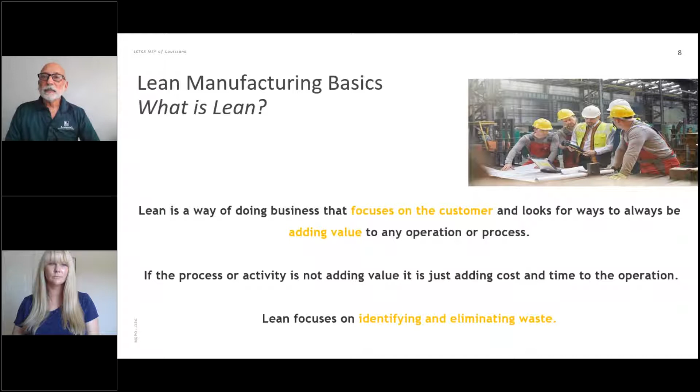The development of lean concepts and tools enables any company or organization to adopt and implement lean throughout their operation. So while the MEP of Louisiana focuses on manufacturing companies, I want you to understand that lean can be implemented in any type of company. In service industries, we've also done it in the medical industry. You can do it, of course, in manufacturing, where we're focusing today, and lots of other places. So lean works everywhere. Once again, it focuses on identifying and eliminating waste and making us more productive.

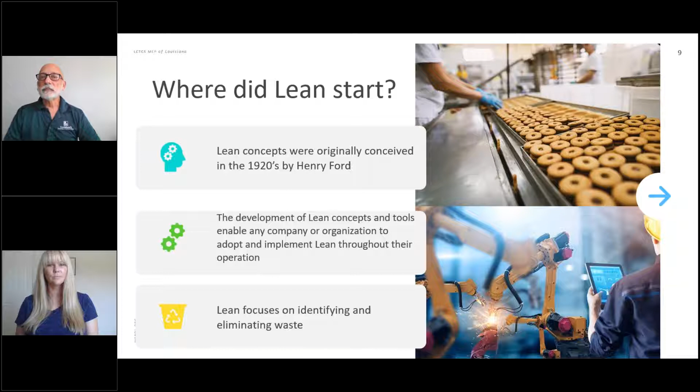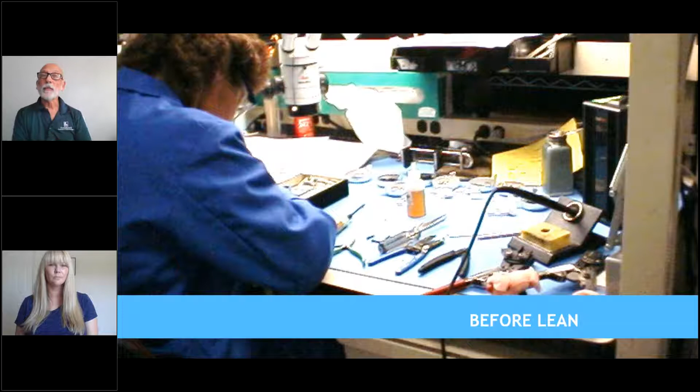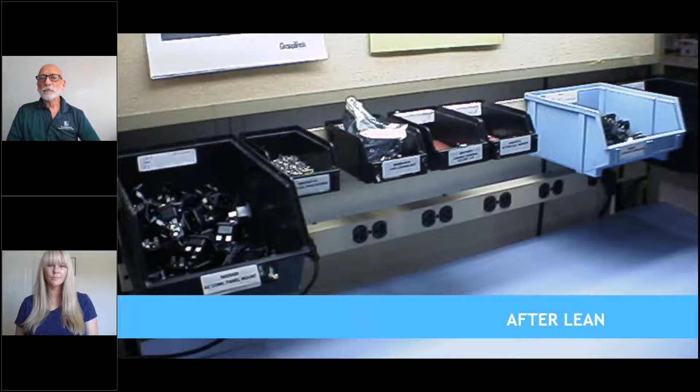Let's look at the next picture as to after lean, what we got. After lean, you can see that all the components used for that job are labeled clearly. They're raised up so that the work surface is clean and neat. On the wall in the background, you can see there are work instructions there to explain the processes for that operation. So lean has always been valuable and important, but in today's climate, it's even more critical that we do this as much as we can so that other people can slip in for us and help out if we need.

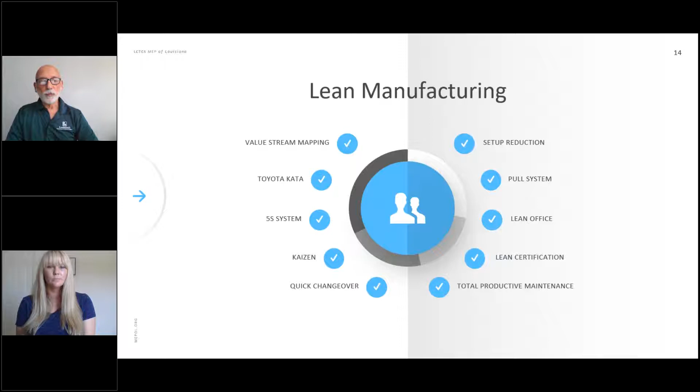And then total productive maintenance is where you're looking at not running equipment to failure, but having a plan in place where you check and work on equipment on a scheduled basis so that you extend the life of your equipment and have less downtime. That's what we're looking for. All right, let's go to the next slide.

All right, so let's look at some examples of the 8 wastes of lean. Typically when we're looking at the time we spend on value-added work, 95% of the time we spend from when we get a phone call for an order to when we get paid for that product or service is non-value added, meaning those are tasks we do that don't necessarily improve or change the product we're making. There are all these other things we have to do.

So let's look at some of those wastes: defects, rework, overproduction, and work in process.

One of the things we do in lean is look at balancing workflow. Right now, especially while employers are very challenged with bringing people onto the workforce and having enough people to do the job, we find sometimes you might go to one station and somebody's really got a pile of work ahead of them, struggling to get their work out that day, and the next person doesn't have much to do. So we look at how we can balance that work throughout the plant, and how can we work better with the resources we have, and not just cause other people up the line to be waiting.

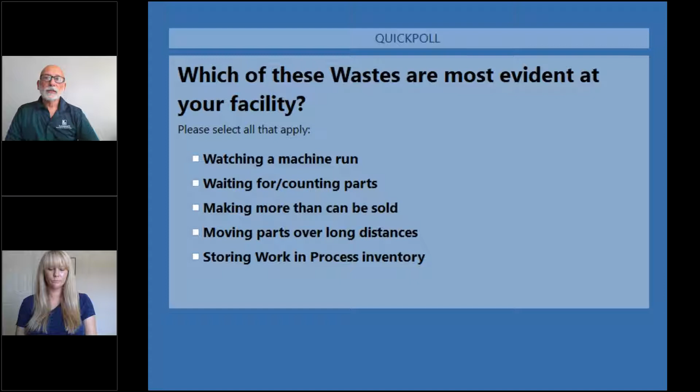All right, so let's look at which ones are the top hitters for us. So watching machine run, right? Sometimes when you just walk through the plant, you might see somebody idle and they're just watching. So either they're very good at what they do and they've automated some of their processes, or there may be a little bit of waste there. They might be just waiting on things, waiting for counting parts. This is obviously one of the top ones that we have in the survey. Things that we can do to eliminate having to do those things manually - either having containers that can fit a certain amount, or ways to count those things a little bit easier, having ways to label those things - it helps eliminate some of that waste.

Making more than can be sold - we may all be a little bit guilty of that. Sometimes we want to keep employees busy, but when you do that, you're tying up raw materials, and you're also putting wear and tear on your equipment and machinery. So we want to keep that in mind. That's definitely a good waste to keep an eye on.

Moving parts over long distances, another high hitter for us. When we come into a company and we work with them about making things more efficient, that's one of the first things that we do in interviewing employees - like, where are you going to get the things that you need, and how can we change that a little bit to make it easier for you so that you can have more productivity?

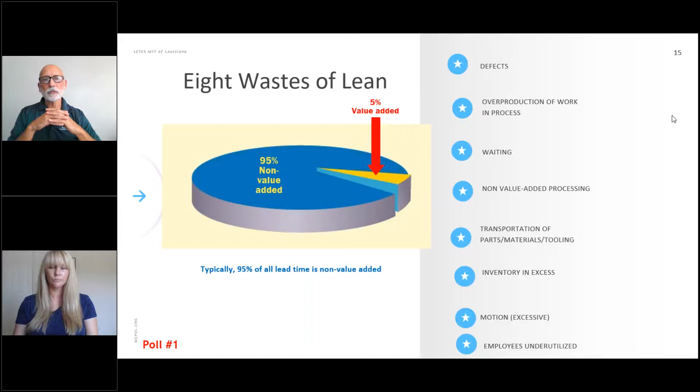All right, thanks so much. That was certainly some good answers for us. All right, next slide.

Why would we want to focus on those 8 wastes? Because the 8 wastes are just symptoms of a more systemic problem. Recognizing waste leads to identifying the root cause. Another thing we train folks for at our plants is root cause analysis, a great tool, looking at the 5 whys and the why tree.

Getting down to the root cause of why something keeps happening, or why we keep having defects, is very valuable. Underlying any waste is a systemic flaw involving people, materials, machines, and or information. Maybe we're working from the wrong instructions, or not the latest revision. It's human nature to point fingers and blame people, but with lean we try to pull back from that and say, hey, we all have potential. Let's look at where things broke down. It's not just a people issue. Maybe they're not working with the best equipment, or something needs to be repaired on their machine so they don't have defects on the final part. We try to look at all those things and get to the root cause so we can make improvements that are sustainable.

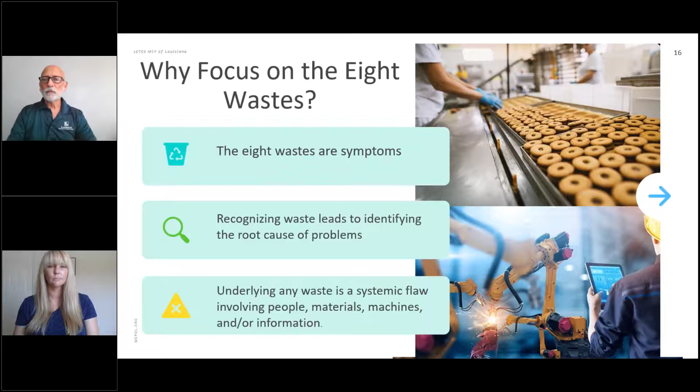The next thing we want to talk about is examples of those wastes. Watching a machine run speaks to underutilized people. We all may think we don't want to be challenged in our jobs, or we'd rather not be so stressed out, but it's human nature to want to be fulfilled when you leave at the end of the day, knowing I made a difference in the company, I made some parts, I got things accomplished. You don't want to watch the clock all day long.

Waiting for parts is waiting waste. As a few of you mentioned in the poll, counting parts, making more than can be sold, moving things -- these are all key things we want to identify. Typically when we come in and work with a business, we do a basic lean assessment to see where the greatest opportunities are for improvement, then identify those areas and start working on the low-hanging fruit, where you can have the most impact, and it becomes a program of attraction.

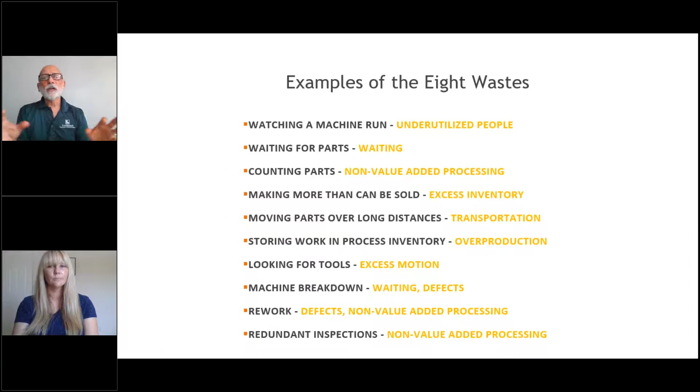We worked with several companies where we couldn't get a volunteer to let us go in and actually evaluate their work area. Nobody wanted to let us know that their baby was ugly. But once we finally got a few reluctant volunteers and started to improve their work areas, we had people coming up saying, hey, can I go next? When is it going to be my turn? When are you guys coming over to my area to make it better? So it becomes a program of attraction where we really want to make things better for employees, so they're not in a stressful work environment. It's a really good benefit.

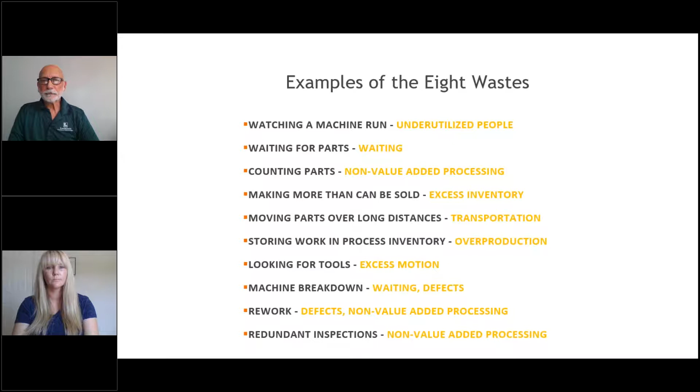Standards are more than documents. In doing lean and implementing lean in the facility, there are several key things, and what we call SOPs, or standard operating procedures, really help make a job much more efficient. If you have employees who are sometimes removed from the work because they have to be quarantined, or they're taking vacation, or they call in sick, someone else has to come in and sit in their place. These things help the whole company stay on their production schedules and be efficient, without more defects and waste.

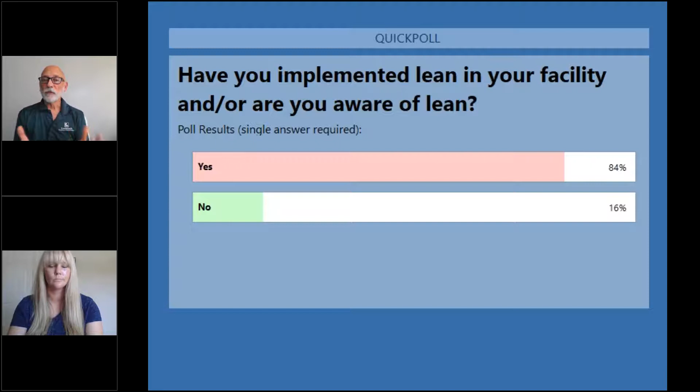So make sure if you're going to have an effort, or you might have what we call a Kaizen event where you're focusing on an area to improve, make sure you're including the people that work in the area so that they have some input and feel valued. You're going to have a much better chance of sustaining those results. Okay, let's go to the next slide.

All right, so another tool we are introducing is called Toyota Kata. We have a little bit of detail on the right. So what this is, is sort of new habits—developing new habits, allowing people to think differently about problems and goals.

Remember a few minutes ago I mentioned we want to get away from finger pointing and saying, oh, it was just that person, boy if you just get rid of that person we wouldn't have any problems. We want to think differently, we want to think as a team. It's an opportunity to work together and use critical thinking skills. We want to use scientific thinking to help make teams and organizations more effective and successful.

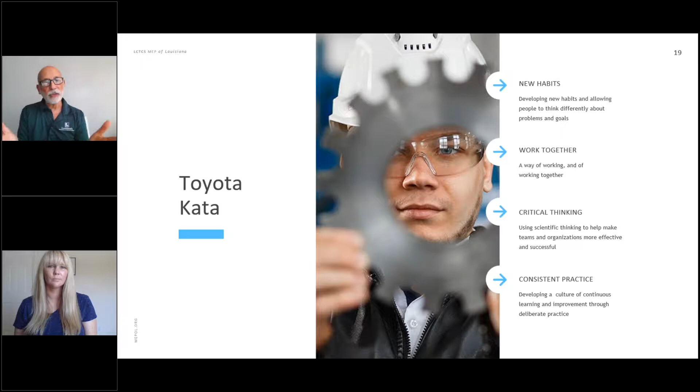So when we try to tackle a challenge or a problem we're having in the organization as a team, we have more input. Sometimes it's good to invite somebody outside of where the issue is happening, so we have outside eyes looking at it from a different perspective. We teach these things to help people develop a culture of continuous learning and improvement through deliberate practice. It takes some time—it's a culture changing thing, but it's also very beneficial and good to sustain.

All right, next. Now we have another polling question after this slide. So we're going to talk a little bit about business continuity plans. Business continuity is planning and preparation of a company to make sure it overcomes serious incidents and/or disasters and resumes its normal operations within a reasonably short period of time. As you all know, or are too painfully aware, we've had 2 hurricanes this past year.

We're in the middle of hurricane season again right now. We had an ice storm that was quite unexpected, and I was lucky enough to have one of my children getting married that week—it was quite an interesting week. And we have to have backup plans for these things, right?

So we're looking at this: what are the components of this in a nutshell? It's a risk assessment, identifying the impacts to the business. It's site and location specific, because even though we have a company with multiple locations, we're not all affected the same way or impacted the same way from a hurricane or a storm or other things like that, right?

It's going to cover all aspects key to continuing to be in business, identifying whether or not we have backup plans, training and drills. This is a critical piece of this. So, let's practice—what do we do? Let's have a mock-up of an event happening, and see if we have any gaps in that, or if it falls through, or we actually execute it well.

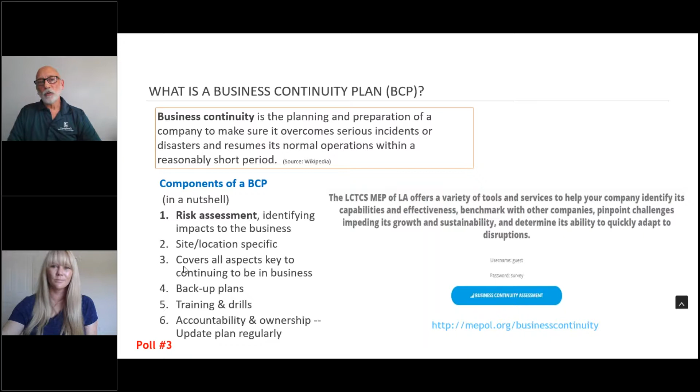All right, let's get on to the next slide. Tell a little bit more about it.

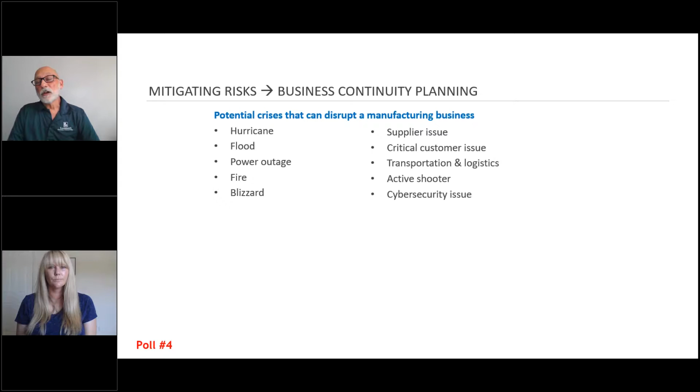We want to talk about mitigating risk. What type of risk? Potential crises that can disrupt the manufacturing business, or any business actually: hurricanes, floods, unexpected power outages, fire, blizzards. I wouldn't say blizzards necessarily down here, but we definitely did experience an ice storm that crippled lots of businesses here this past February. You wouldn't guess it from the temperatures the last few weeks, but yeah, we did suffer that. Supplier issues — while you may be in an area of the state that doesn't often have to deal with any of these things, or you really have your business set up well, you may be impacted by whether your supplier can get to you or not. Having some backup plans are critical.

Another service that the LCTCS MEP Louisiana offers is scouting for suppliers throughout the United States. A key benefit of the MEP, and the fact that it's here in Louisiana, is that we're connected to all of the MEPs throughout the United States. We have a portal where, if we have a request from a client looking for a supplier — maybe one of these things happened to them — we can send out a request and look for help to do a scouting project to find a backup supplier, or to get another key supplier so that you're not so dependent on just one, okay?

Critical customer issues, transportation logistics — when roads are frozen or there's flooding and different things — are issues you want to make sure you can mitigate. Active shooter, a fairly recent phenomenon we have to be mindful of. Do you have a plan? Have you communicated with your employees if something bizarre happens? Do we have muster points? Have we gone through some drills? Do we have a plan for that? It's important to communicate those things.

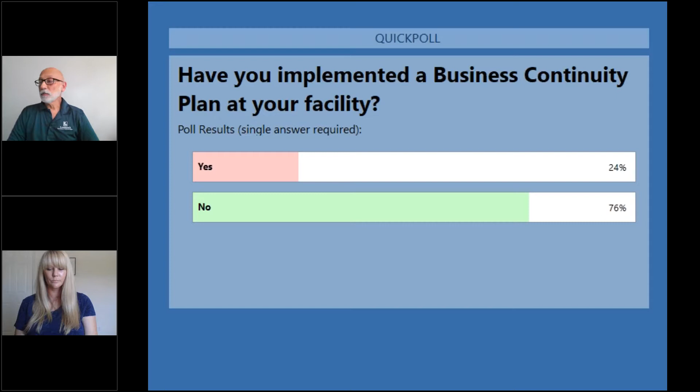Let's see what our answers are here. Wow, okay, so it looks like we have quite a bit of opportunity for the participants on this webinar to use MEP's free tool. So feel welcome to get on there and try that out, and we can follow up with you.

It's important. We all know that we have experienced hurricanes. They're not just a myth. That's definitely one thing, and we're in the middle of that season right now. And then there are these other things that could come up that are quite unexpected. So talk to your other leaders in your company when you get off this webinar. Ask about that, it's not a bad idea to start down this path. And as I mentioned, it's a free tool, a free service that we offer.